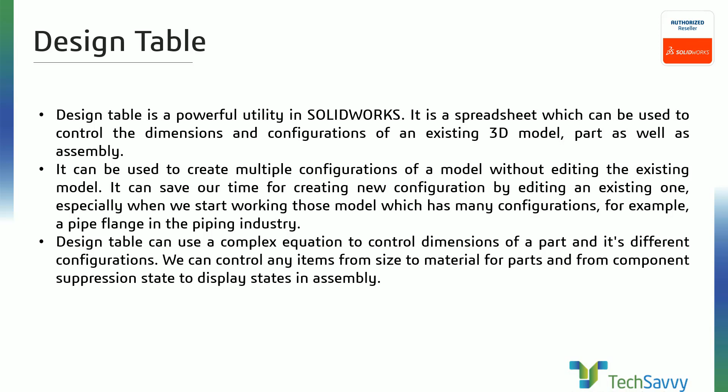So, equation and global variable - let me give you a brief idea about the equation and global variable, as I have already done a training session, a detailed session, over equation and global variable.

When we design components, we can relate dimensions - sketch dimensions or feature dimensions - or pattern instances to other entities of the same type, like sketch dimensions to other sketch dimensions, or pattern instances to other pattern instances, with some relation or ratio. We can also relate different entities, like sketch dimensions to pattern instances, or pattern instances to sketch or feature dimensions. We can also add independent values, generally called global variables in SolidWorks. We can relate our sketch entities, dimensions, or pattern instances with these independent values using ratios or directly. The benefit is that by modifying just one value, the whole model or all connected entities will automatically update.

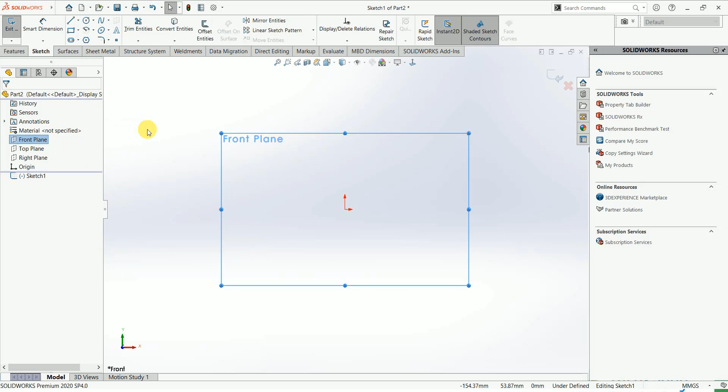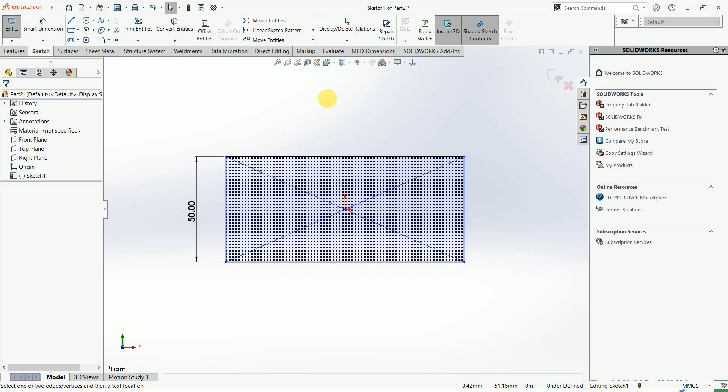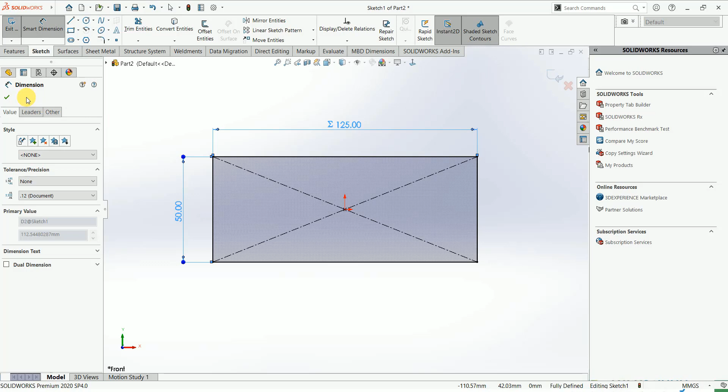Let me show you this in 3D CAD live, then we will move to design table directly. I am going to create a rectangle and provide a dimension. Now I can link the next dimension with the previous one directly like this, or with some relation, like multiplied by 2.5. This is what I want to say - this is the example for sketch dimensions.

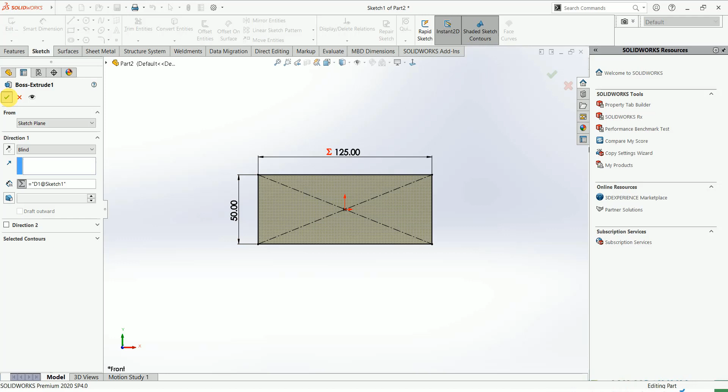Now I can also show you the example for feature dimensions, by double clicking on the dimension or editing the feature, like setting it equal to another dimension. You can relate it directly with this dimension, or with some relation as well, similar to the sketch dimension. So this is the brief idea about equations.

As soon as you add an equation, you will find an equation manager in your design history. Quickly, I am going to delete this. Now you will find that your equations are free from any types of relation - there is no red mark of equation existing here anymore.

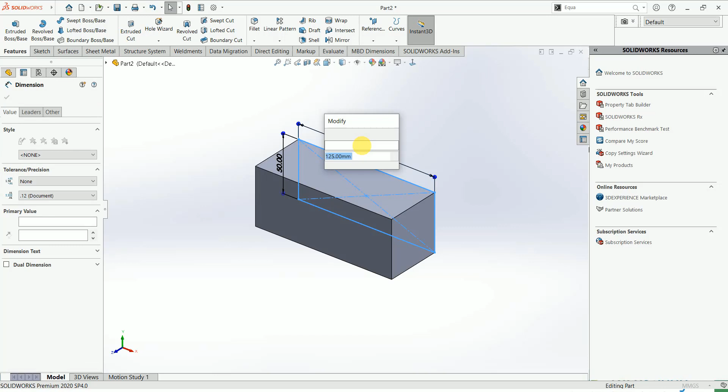Now it's time to quickly add a variable as well. Let's say A or X, and put the value of this variable at 50. Now what is next? The next step is we can make our dimension entities relate to some independent variables.

What is the benefit of these relations? As you change the value of the independent entity, the dependent entity will automatically be modified. Like in the first case, the 50 dimension was the independent entity and 125 was dependent. In this case, this variable is independent. Now I am going to change this value to 75 and rebuild it - now I will see the rectangular dimension has changed.

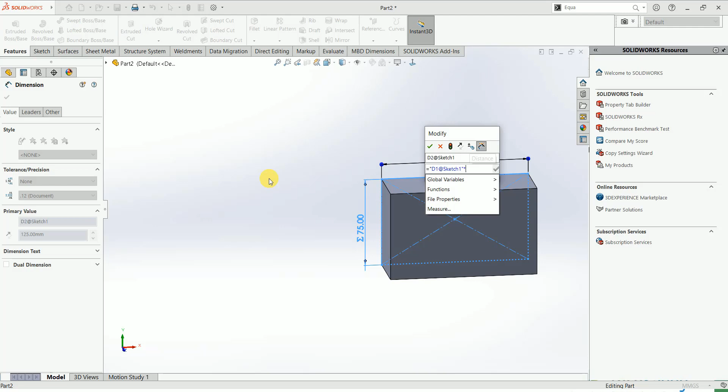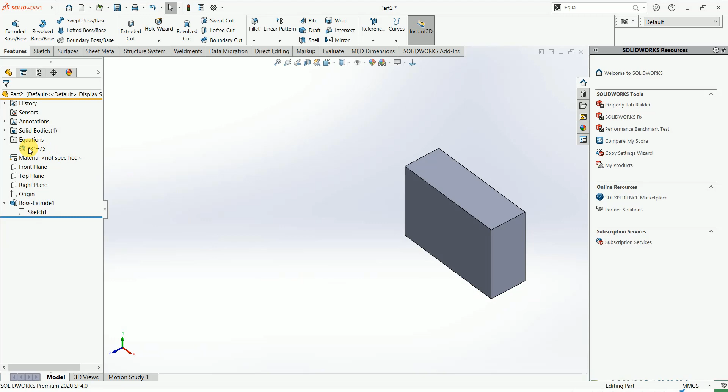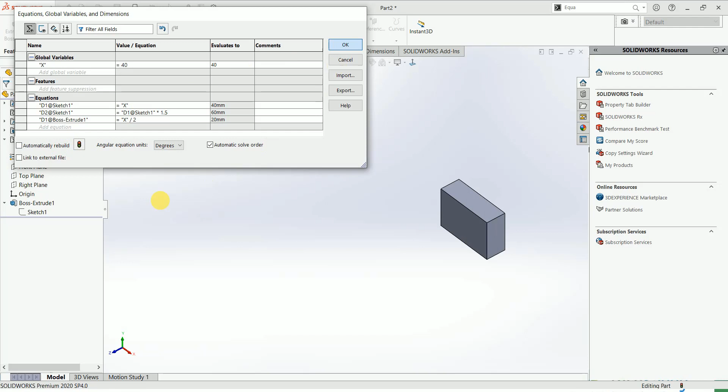Now it's time to relate this dimension directly with an independent entity, a global variable, or with the same type of entity like this dimension. So this is the time to make some relations. Now you can see, as I change just this global variable, almost all connected dimensions will change. This is the main benefit of equations. Now I'm going to put some dimensions like 40 - the size will change, and you can see the dimensions have been automatically varied. So this is the main benefit of equations.

I am not going to spend more time on this, so let's quickly move to our slide. Now, next is design table.

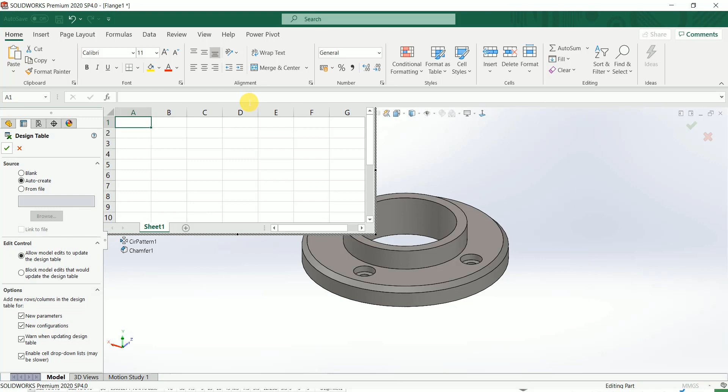Okay, you can see all the entities which are different for both configurations are recorded here.

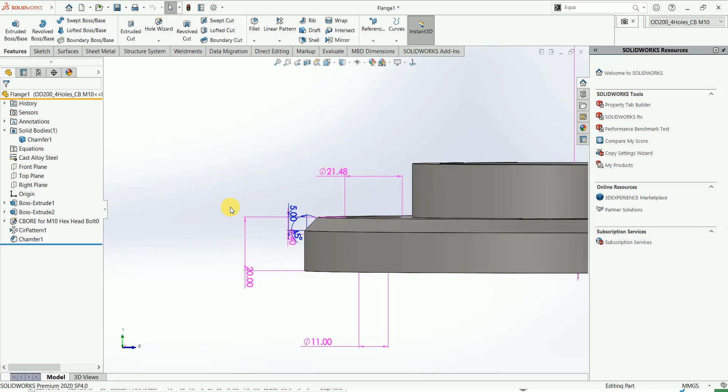And one more thing I want to show you is that you can also control feature suppression. Feature suppression I have already explained through the chamfer feature. Let me show some feature dimensions, as this dimension is not controlled in the design table.

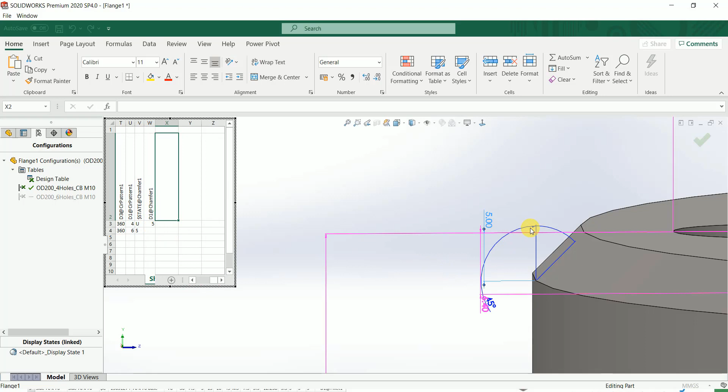So, to the design table, in a new column, just select some dimension. You can see the value is automatically added, 5, and this angle. Okay, so this is the method of how you can directly add dimensions inside your design table. And now these two dimensions are also controlled through the design table.

So this is how you can use a blank design table. Now this is the time to create some new configurations with the help of the design table directly, without going into dimensions manually one by one and changing those dimensions again. Okay, so this is the time to add a new configuration.

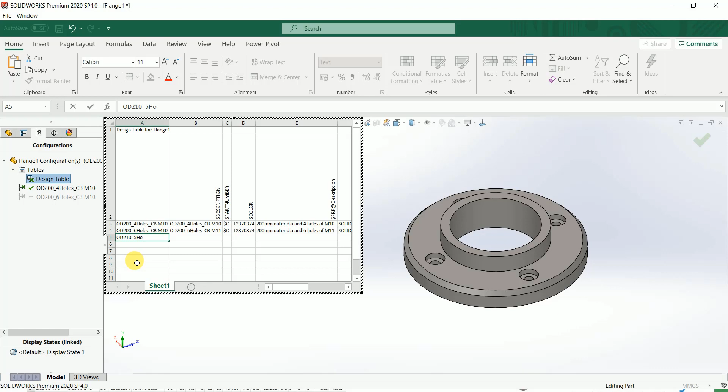OD 210 underscore 5 holes. Okay, counter bore. You can also change the counter bore size as well. Quickly type the description here.

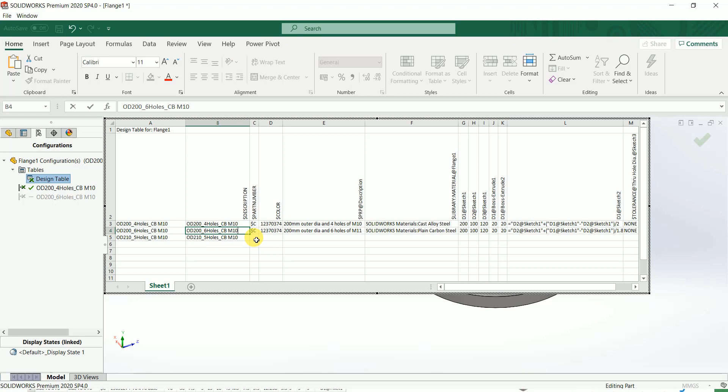I am just going to copy this description and paste it here. Okay, just copy and paste all these values as they are. You can change the part number, as I have already changed the part number on the basis of the configuration name. So now the part number will show you like this.

Property description: type the description here as a custom property, 210 mm outer diameter and 5 holes of M10.

You can also select material from the material list. Just copy this material list and select a different material, like malleable cast iron. Now type the value, let it be 100. This is the PCD. Boss depth 30.

And 30, this is basically an equation-controlled dimension. So just type it here and provide a different value, like 2. Now I am not going to spend time on appearance. Just copy this. Hole size is the same. Circular pattern number, 5 holes.

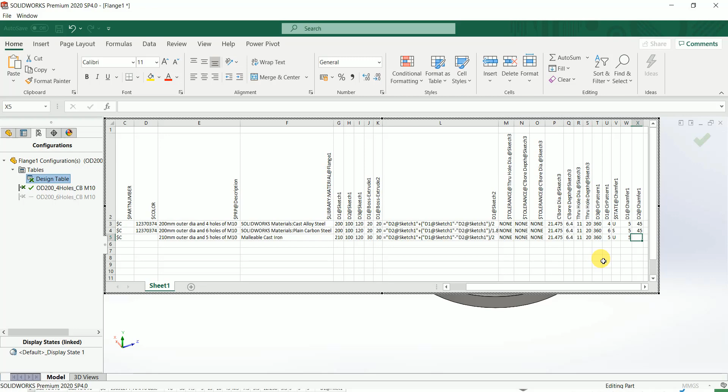I have already typed in the description. Let me type in the description. Okay, I have missed it. Sorry. And now this is the time to decide at which stage the chamfer will appear. Unsuppressed size will be 5 and 45. Now, okay.

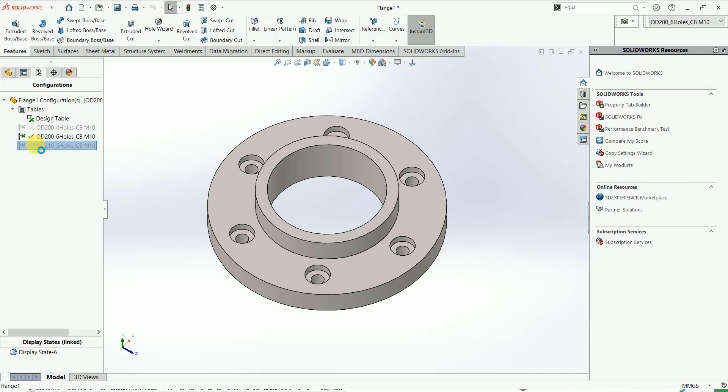Okay, now you can see the new configuration has been created perfectly without any error inside the history, with the material you have provided. And so this is the design table.

This is the major benefit of the design table. In case of a large number of configurations, there is no need to create a new configuration each time, and no need to put dimensions for each configuration again and again. Just open your design table, fill in all the details required, and click OK. You will find all configurations automatically created and controlled through the design table.

Okay, and this is the time to show you some properties, like configuration-specific properties, for different configurations.

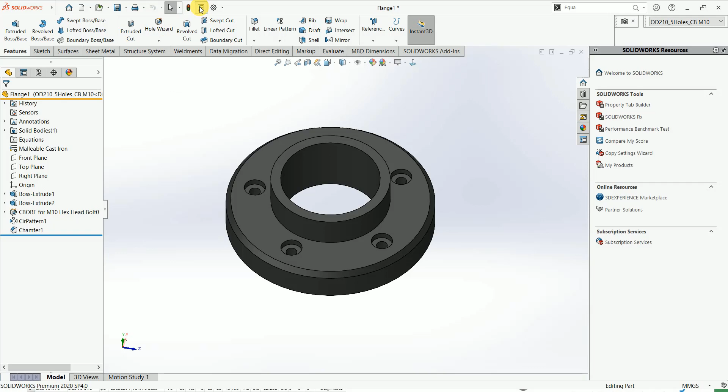You have seen that I have copied description configuration specific property information from one of the rest configurations and just modified it, and this detail is reflecting here. So how easy is it to create this? You can add material, part number, drawn by, checked by, all the configuration specific properties inside your design table, controlled through your design table.

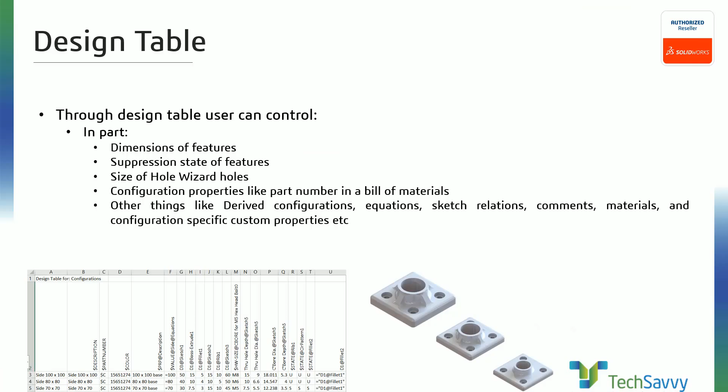So let's quickly close this, and let me move towards assembly. I have taken pretty much important time of you.

In case of assemblies, we can control reference configurations, fixed and floating position of the components, and the suppression states of components, size of the hole wizard and dimensions, suppression states of the assembly feature, and also we can control the suppression states of mates and some variable values, advanced mates like distance mate and angle mate.

In case of these types of mates, we can control the dimensions like limit dimensions of limit distance mate, or angle dimensions of angle mate, or limit angle mate also.

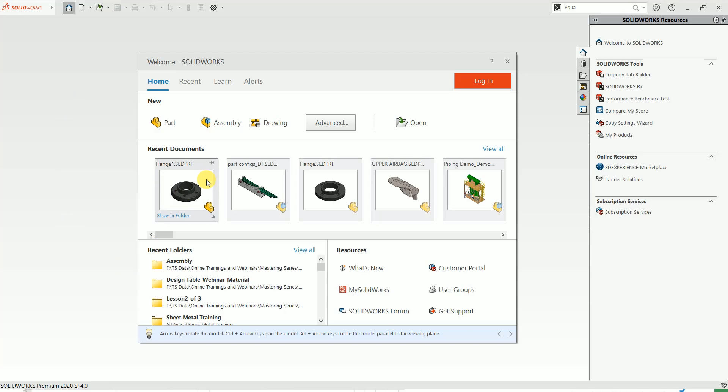In case of configuration properties, similar to the part, we can control configuration properties like part number in bill of material for components and sub-assemblies also. We can also control derived configurations, equations, sketch relations, comments, materials, configurations like previously I have shown you. So let's quickly move to 3D CAD and let me show you how you can control these things.

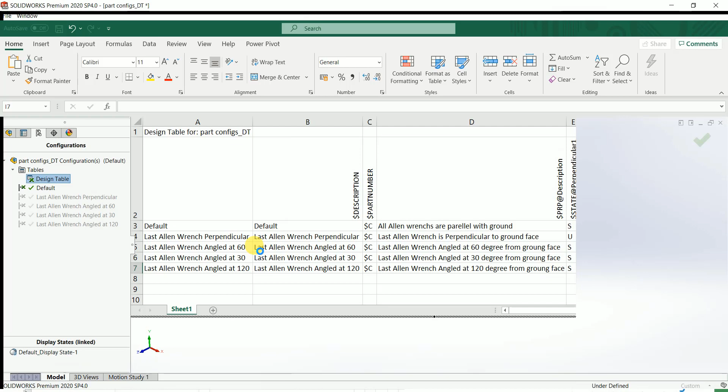Okay, this is the assembly. I have already added some design tables here. Let me show you the design table. Quickly go and edit this design table. Let me add one more configuration inside it.

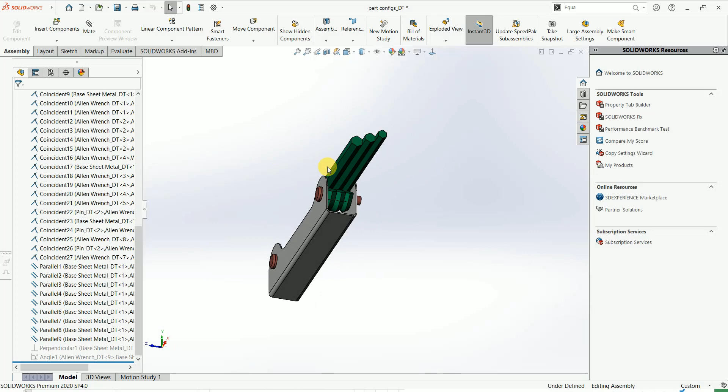Actually, you can see what I have done in these configurations. This time, all pins are parallel with some plane, parallel with some plane and this planar face. And what I have done is added some perpendicular mate with the edge of this pin and this face, and also some angle in between the plane of this pin and this face.

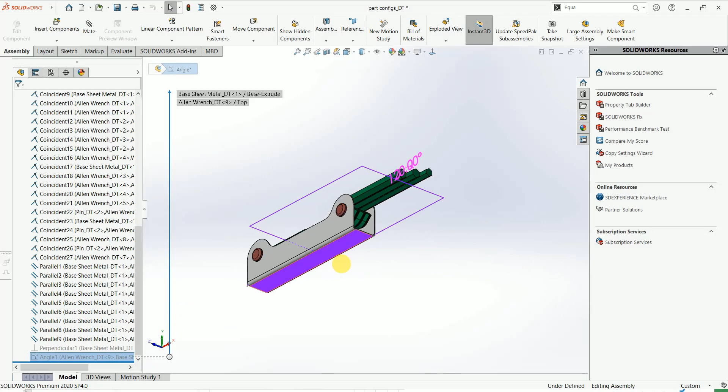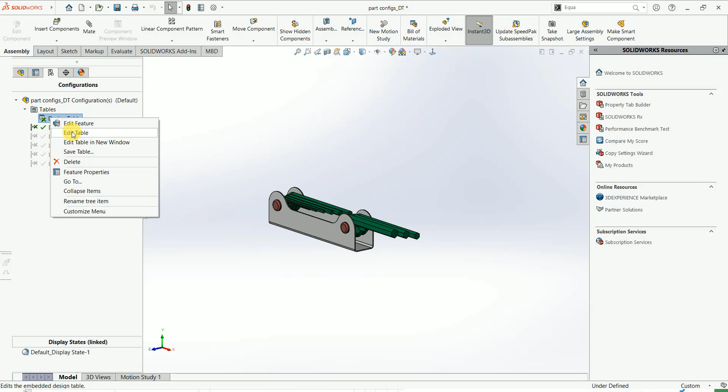So I have also explained that we can control the suppression state of mate like this. You can see this parallel mate has been suppressed, and this suppression state could be controlled through design table. Let me edit this design table and create a new configuration for this.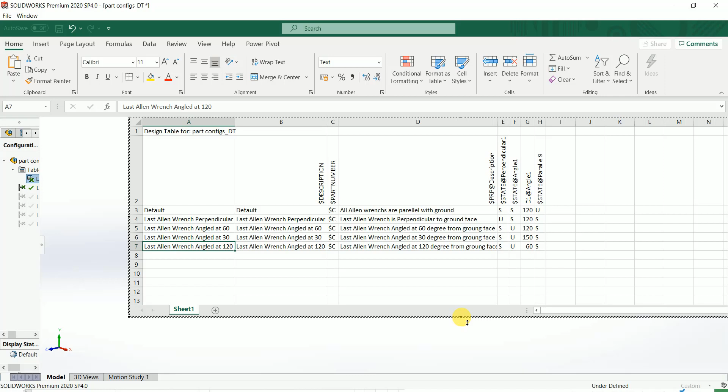First, let me position my assembly in the correct way. Then, actually, I want to show you the workout of the assembly along with the design table. And you can see the parallel mate has been suppressed here for this pin. I am going to create a new configuration for this pin.

No need to type again and again. Just copy this and modify the value to 120, to 150.

Now just copy all these rows as it is and modify the values. The configuration name is shown as configuration name. Basically, part number inside the BOM is controlled by this property.

I will show you in the 3D model also. In this, I am going to control some configuration specific property, and this perpendicular mate is suppressed, will be suppressed for this condition. This parallel mate will be suppressed for this condition.

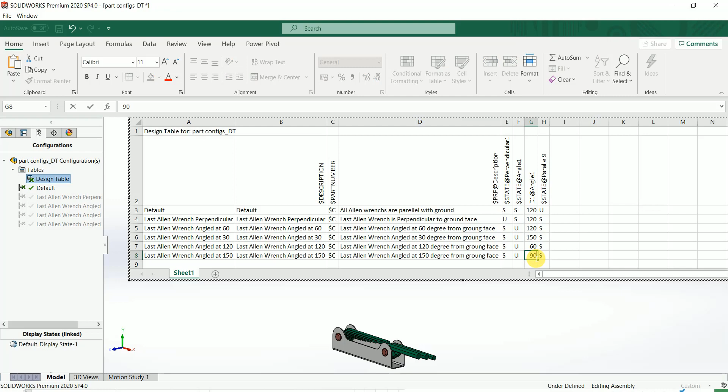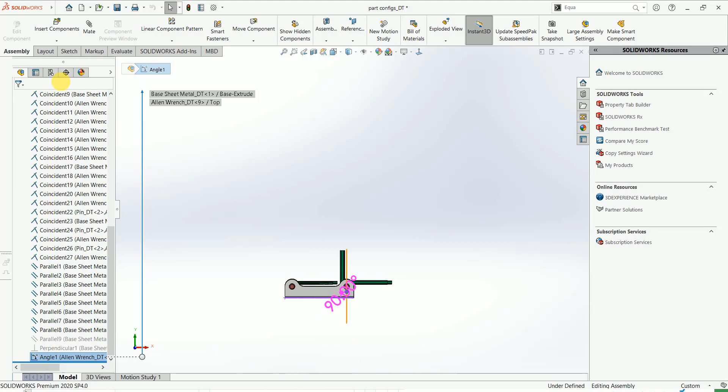Now the value will be 90. Let me see what I have created. Okay, so by mistake I have made it perpendicular. I think I have put the value from the wrong side. Let me see from which direction the value has been taken.

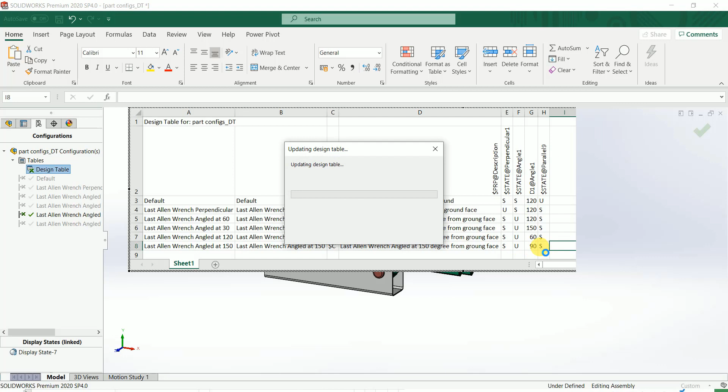Okay, for the 120 configuration, the value is 60. Let me type the value 30 inside the design table. We need to put this value 30 because the angle measurement is from another side.

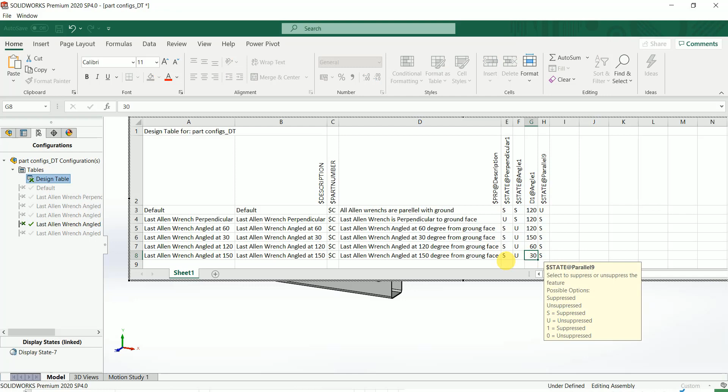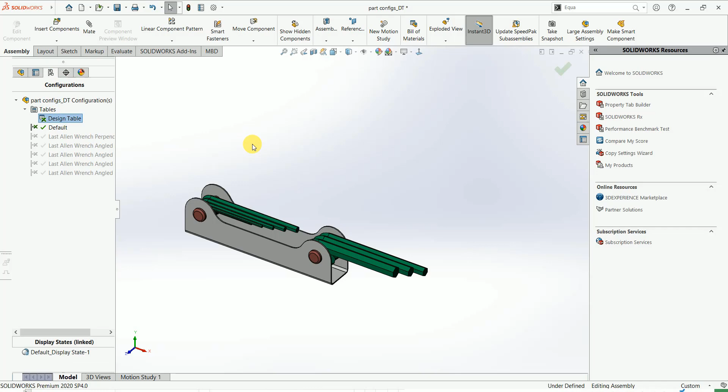Okay, now this is 150. So the configuration has been created. Now if we suppress any item, then one more state, one more property will be added inside our table. We have to just click and select and click OK. So this is suppress and resolve.

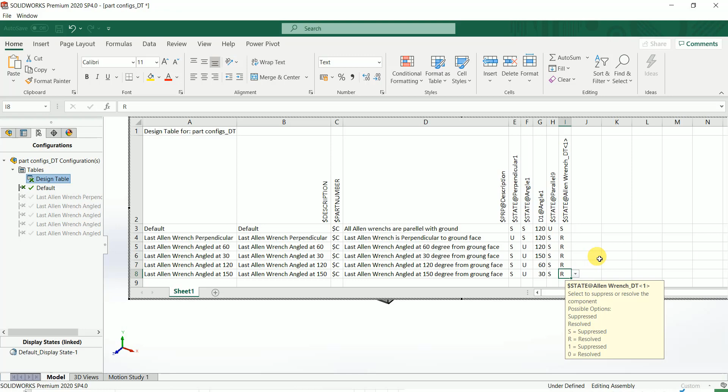And here I have to... okay, now by this we can achieve the condition which we want to do. Or we can also use component display state, I think.

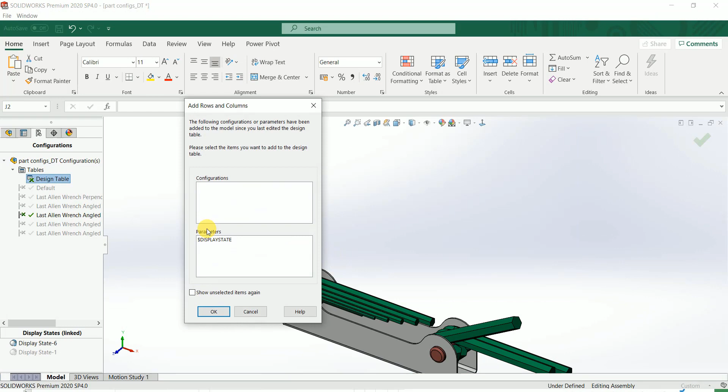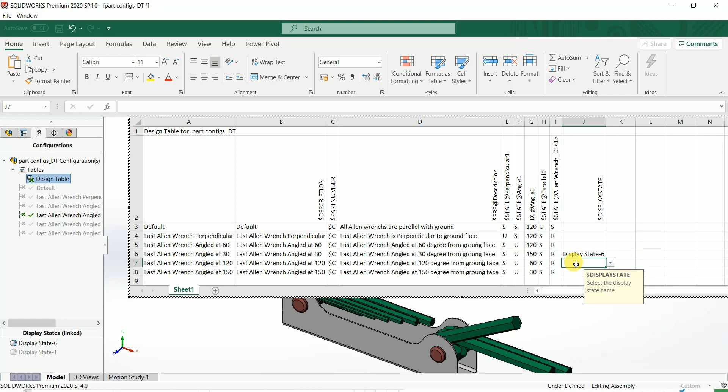Okay, now this is the time to add display state. So in case of configuration, just call the display state. If you have made some different display states in large number, you can just call the display state and use it inside your assembly. So this is the time to close this part also.

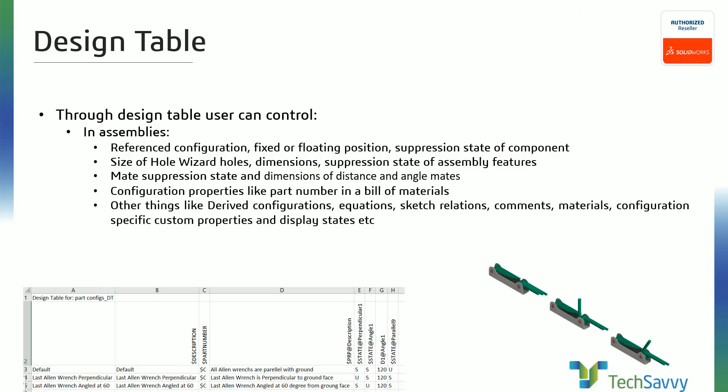Now this is the time to move our slide to FeatureWorks. Our next topic is FeatureWorks. So with the help of FeatureWorks, what can we do? Let's take a brief idea about FeatureWorks. FeatureWorks is an add-in provided in SolidWorks 3D CAD for all modules like Standard, Professional, and Premium.

It enables users to work with imported data like STEP, IGS, Parasolid, and other native 3D CAD data. It helps users convert a single imported feature into different supported geometric SolidWorks features. On the converted or imported data, users can also create new features later.

These features and some more are controlled through FeatureWorks. We can control both solid imported data and sheet metal imported data through FeatureWorks.

Let me show you how we can control this. Let me open a Parasolid file first. This is the time to import and run diagnosis.

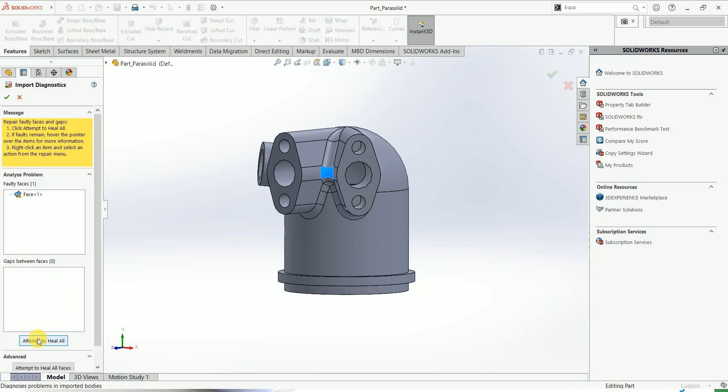Attempt to heal this. It will automatically ask you to run a feature recognition. Click no, and you can enable your feature expert from here or disable it.

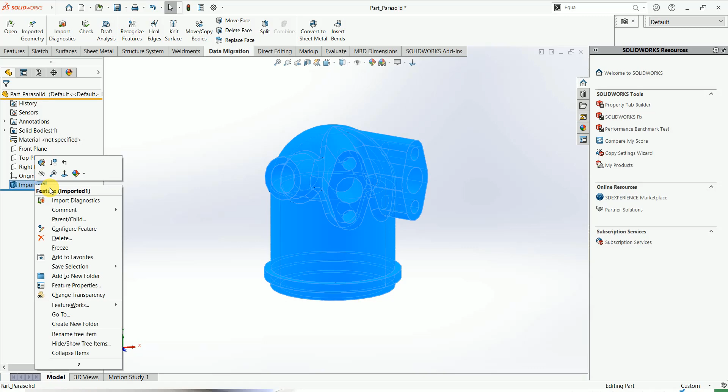You can control it from here. Import diagnosis and FeatureWorks you can directly run from here. Now this is the time to run FeatureWorks. You can run it from data migration, recognize feature, or run feature recognize from here. You can also control options for different settings, and whether feature recognition is performed in a different window or the same window.

Now this is the time to show you the difference between automatic and interactive feature recognition. First let me show you automatic, then I will show you interactive. In case of automatic, you can just select one or more options from here.

Now the model is recognizing different features. What FeatureWorks will do is automatically convert this model into standard SolidWorks geometric features, not in the form of loft or strip, but standard geometric features like extrude, revolve, cut extrude, cut revolve, hole wizard.

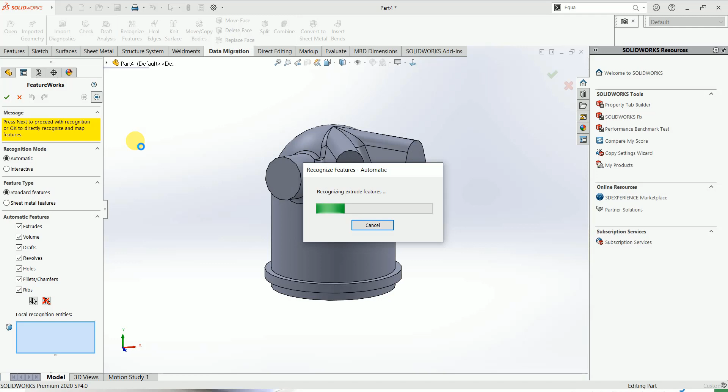The model is still recognizing. Now this feature collection has been recognized. Click OK, and let's see how your history will be created.

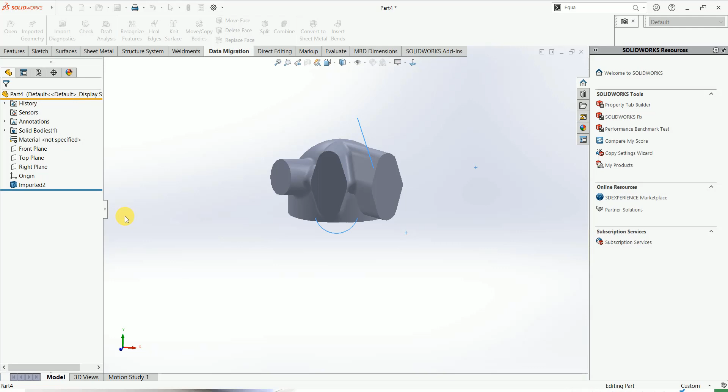Now this is creating a model history for you. Sometimes there is a little difference in the history; it may not be exactly similar to the history created in the native CAD software.

Now I'm going to showcase FeatureWorks for sheet metal models, with a simple example for interactive feature recognition.

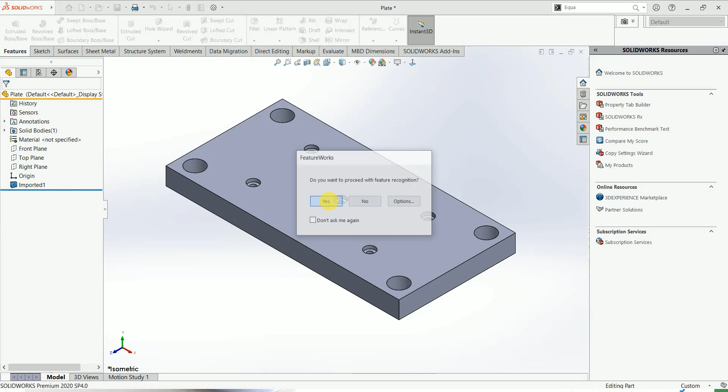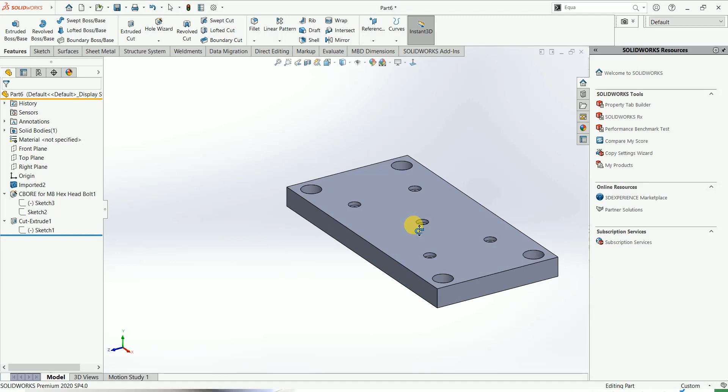In case of interactive feature recognition, you can use this property manager like this. The wrong feature I have selected. Now this is the time to select cut extrude, and the feature is recognized. The cut extrude has been created, or we can directly edit the feature and it will be added to our history. This is interactive feature recognition.

Now this is the time to check the feature recognition process for sheet metal bodies. Let me show you how feature recognition works for sheet metal bodies. Just try to attempt this. Now click yes.

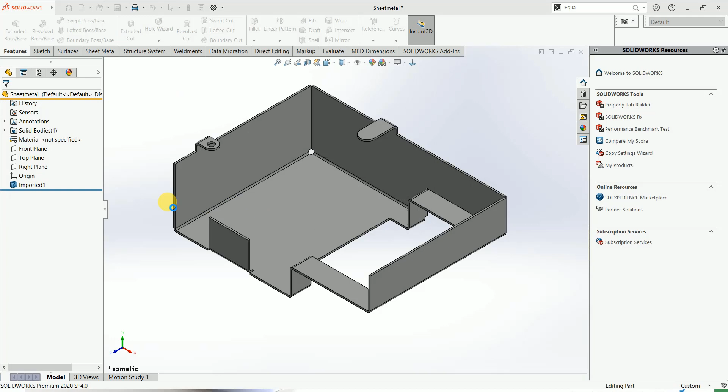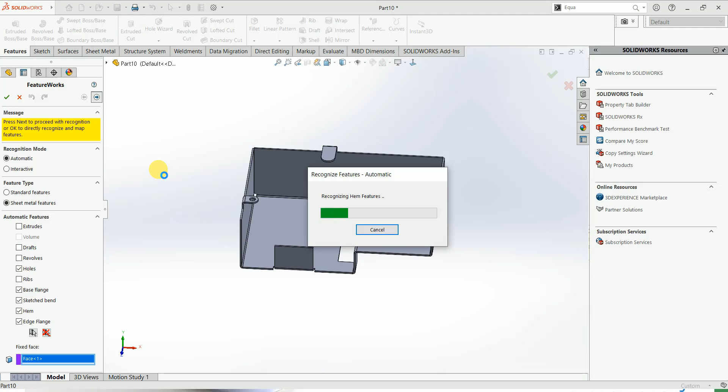Proceed with sheet metal features. The feature has been recognized. You can see some processes running in the background. Now this is the time to click OK.

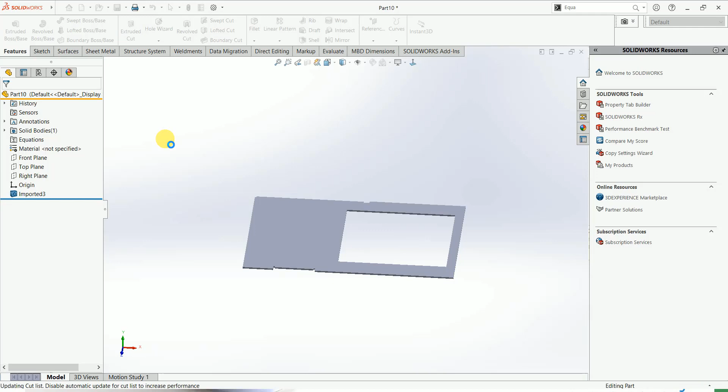Let us see how this tool will work for us. Could we get it to create some flat pattern for this model with the help of sheet metal feature recognition? I think some of the things have been created for us. Now this is the time to check by clicking on flatten. A pretty good flat pattern has been created.

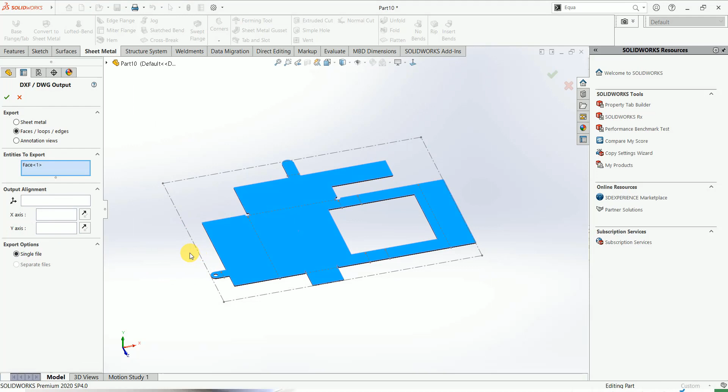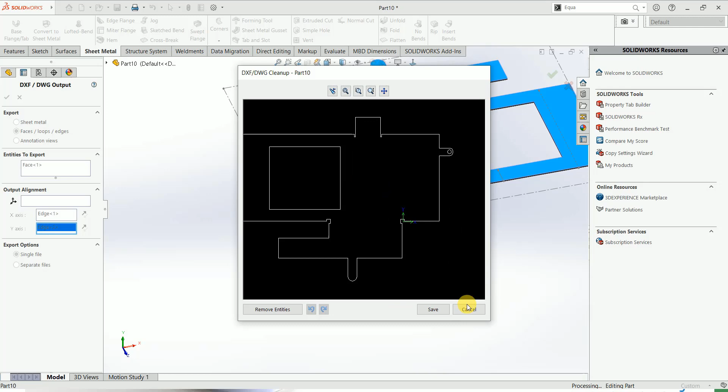Now this flat pattern can be directly exported into DXF. I am just trying to export this flat pattern into DXF/DWG. Now you can see the DXF is pretty good. So this is the process of feature recognition.